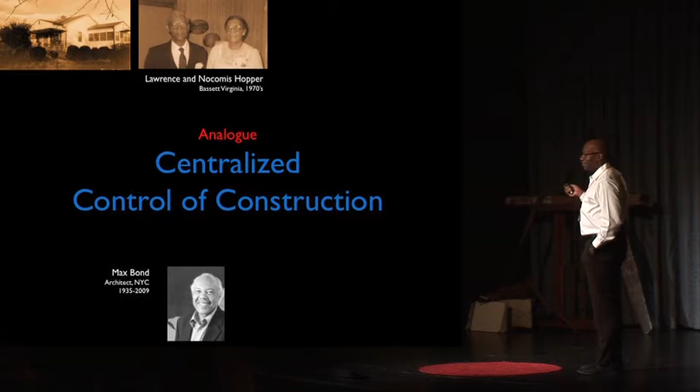My grandfather was a man in Virginia. He only had a sixth grade education, and he built this house for his six children and my grandmother with just a few very simple tools, very common tools, saws, drills, knives, blades for cutting tiles and things like that. But he did a great job with very little. In fact, I definitely couldn't do that. I can't even build my daughter a playhouse. So just the thought of being able to do something like this has always intrigued me.

But I grew up in New York City, and I watched this architect, Max Bond, since I was in high school, build low-income housing for people in my neighborhood, which was Harlem. And I noticed that he had a really great way of getting good, high-quality housing to large numbers of people at a somewhat reasonable price. But I don't think that's always possible today, and I'll sort of explain why.

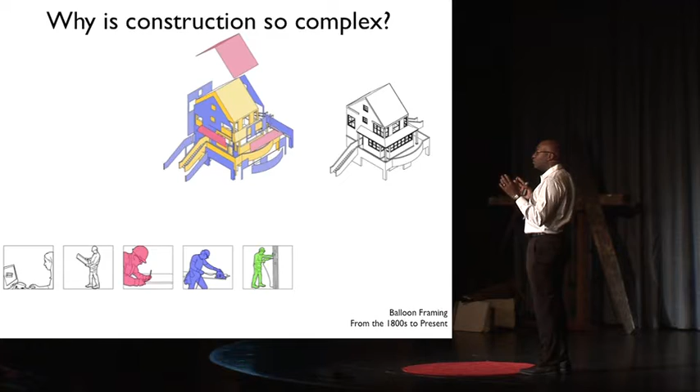I think most of us always ask the question, why is construction so complex? Why is it that when a tsunami hits, or an earthquake, or a hurricane, it takes so long to rebuild all of these rich, interesting houses that we've lost? A great example is New Orleans, which is still struggling. Well, it's very simple. The one thing that all carpenters do and designers do is compute. It's a common theme. Everybody computes, which means that everybody's counting and thinking about geometry and how objects fit together and how to count steps in producing an object.

So here, for example, you have a designer at the left-hand side, a contractor interprets the drawings, someone takes that interpretation and marks it or measures it out onto a piece of material, cuts and assembles that. One problem today is that the person at the end of the chain has very little relationship with the person at the front of the chain. The designer has no influence on how things are assembled in construction, and the people who are all the way at the end of the chain can never participate in the design.

So if you look at the colored image of the house, it's a James Cutler house from the 1990s. It's a wooden structure, wood framing, which is the yellow, which goes up very quickly. Wood framing always goes up very fast. And the complexity is getting all of the other colors onto it, the slabs or the tiles, roof tiles, waterproofing, getting all the additional materials, flooring, getting all of that stuff cut, measured, and assembled. So the complexity is in the red, the blue, and the green person. Each component in the house has to be touched, measured, and manufactured by someone. So if you have 10,000 pieces, you're repeating that step 10,000 times over.

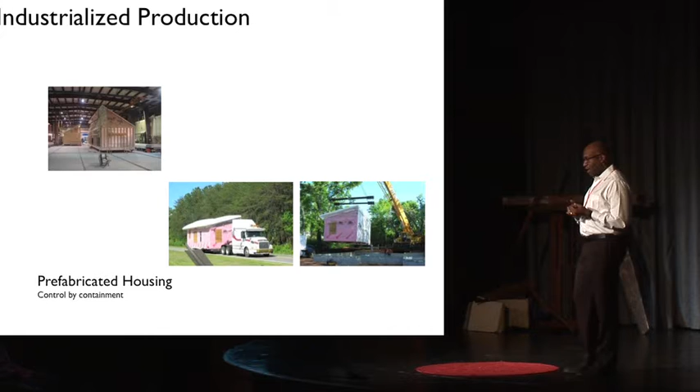Pre-manufactured housing is no different. You're paying for all of those steps, plus you're also paying for the heating of the factory, you're paying for the crane, you're paying for the truck. You're also paying for double the structure. You have to structure the box for movement, and then you also have to add more structure to the box just to make it a little bit stronger, but you're paying for a lot more. So the industrial process is a very labor-intensive, and in many ways, I think, out of control method of production.

So today in the information age, we have a way of producing things that we're probably not even thinking about or aware of that's happening around us, which is the idea of decentralized production. And if you think of decentralized, you could probably think of what's been going on in the Middle East. There's no single person that's in control of all of the things that have been changing, but you could tell that there's some level of control. So the question is, how can we do that today?

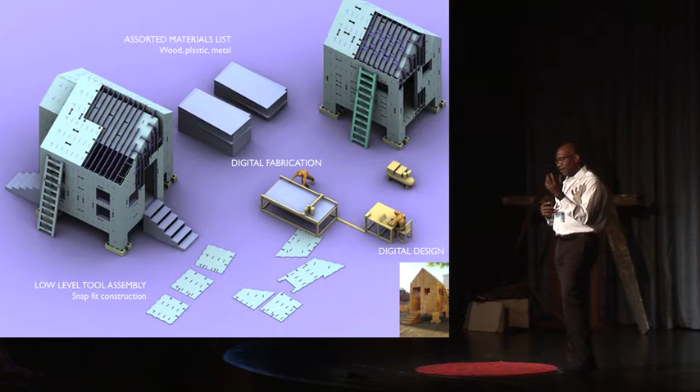And here's a sketch that explains a little bit of what I'm talking about. So you have to imagine the digital designer, the person sitting at the laptop, downloading a file or downloading a series of files, and then they send that to a machine that's run by the computer.

And the machine doesn't just cut out parts, raw parts. The machine also puts a number on each part, and the machine draws each part or cuts out each part so that it only fits in a certain location in a certain way.

I had come up with this idea back around 2003, but in 2005 I had a chance to build a small cabin which was made out of all interlocking parts. It was about 80 square feet, all interlocking plywood pieces, no glue, no nails, screws, anything. And again, it's because you can calculate how things go together, and you could also calculate the strength of each part.

So this image shows a little bit of the advantages. The first is that everyone can participate in the process. So I have two students here, Dan Smithwick and Dennis Michaud, and what they're doing is they're building the computer model. They built the two computer models up at the top. One is the skin, and one is this internal lattice. And they built them separately on two separate computers. And then they brought them together by prototyping the pieces.

So they ran the pieces through the laser cutter. The laser cutter cut out all the parts with all of the connection pieces, and they were all numbered. It was all encoded on each piece, and then they attached them together to check and see if all the pieces fit. And I'll show this project a little bit later. It's a museum exhibit in New York City, and there's Dennis up on a ladder assembling the parts that he just laser cut about a month earlier.

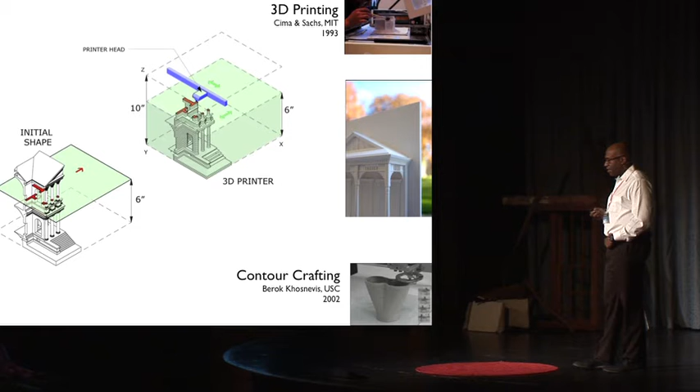But the process, I was inspired to do this by looking at three-dimensional printing. I was introduced to three-dimensional printing by my PhD advisor, Bill Mitchell, in the late 90s. And the one thing that happens with three-dimensional printing is it automates the three areas of computation that I just mentioned. It takes in a three-dimensional model from a designer, a kid, anybody can print with a 3D printer. It scans a section through the model, does a calculation where it creates the contours around a section through the model, and then it prints one layer at a time, just like a layer cake. And each layer is adhered to the previous layer.

So as an automated system, it's doing three things at one time. It's measuring, manufacturing a layer, and then it's assembling that layer to the previously manufactured layer. So it's doing those same three operations in one shot. And you can produce really beautiful models like the one in the middle. It's a model of a New Orleans shotgun house.

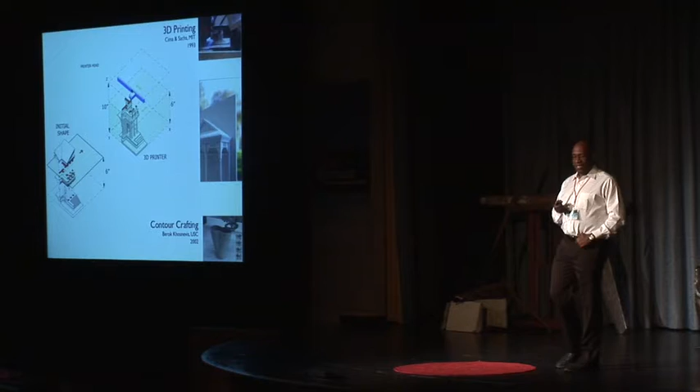But then at the bottom, a really good friend of mine, Berok Khosnevis, back in 2002, came up with the idea of house printing and printing with concrete, as opposed to printing with plaster or plastic. And his idea was that you would print in big, nice, thick 3-inch layers or 2-inch layers of concrete, one layer at a time. But you can imagine that gets a little difficult and redundant, and it's not scalable. If you need a house, you need a machine the size of a tall building. If you need a tall building, you need a machine the size of a gigantic building. So it makes it very difficult to scale that type of process.

So my idea was almost the same thing. Take a three-dimensional model, read in that data, run calculations over that model, and then develop the pieces into two-dimensional sections and cut them with a laser cutter, or a CNC machine, or a water jet cutter, or some cutting device that's controlled by a computer. So here what I'm showing is a ball that was first made in the computer, and then we ran it through a few computations, and it managed to develop all the little parts. But then we were also able to take each section and turn it into a variable, and then again calculate attachment features with each part. So each part has an attachment feature, an association with the next part.

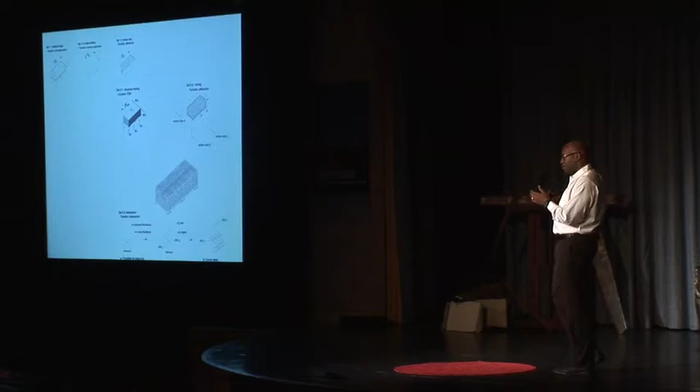So looking at this a little bit larger, I realize this drawing is a little hard to see, but I'll explain it. You're looking at a small cabin, about 15 feet by 30 feet. And what I've done is the same thing. We take in a three-dimensional model, we take variables from that, we calculate, we store those variables, and then we do calculations on them. So the little box in the middle shows finite element analysis, calculating that building using a computer program to test it for structural capacity. And then if it passes, we then go through the same sectioning process that I had mentioned with three-dimensional printing. We slice the model in sections, but this time we do it in 3 dimensions. Instead of just slicing in the Z direction, the way that we did with the layer cake, this time we slice in X, Y, and Z.

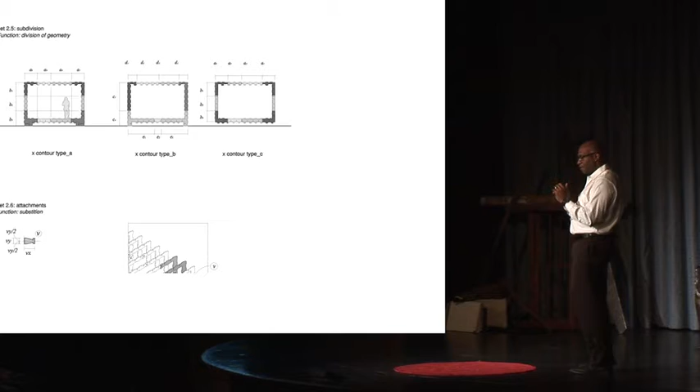And then we end up with contours. So if we look at a contour a little bit more closely, you could see from looking at the size of the person that that contour also needs to be subdivided into small parts. It needs to, again, go through another computation.

And carpenters do this. This is exactly what carpenters do. They take parts, they figure out what the maximum size of the part is, they divide that part up by a certain number, they calculate on a piece of paper what it should be, and then they recut the part that they just cut.

So then here are a couple of other calculations just looking at the surfaces, but this is another operation called development, where you take a three-dimensional shape and you convert it or copy it to 2 dimensions, pack all the parts together, sort them, and then fit them all onto a sheet and give each component a number.

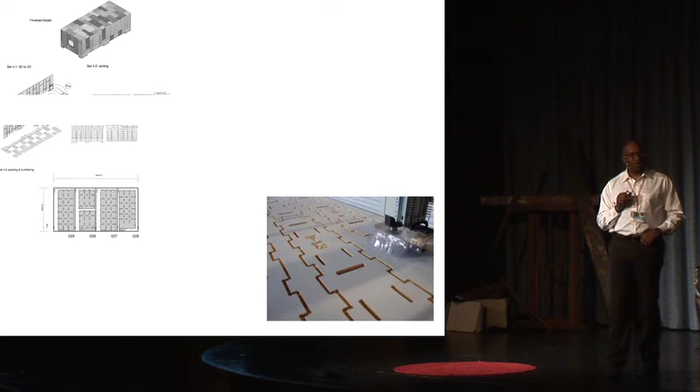So if we look at this slide of a part being cut, the part has a number of small, little, tiny micro fabrication pieces to it, cuts to it, and it also has a number.

So to give you an example of how this works, I showed you the cabin. Here's another project that I worked on back in 2008. It was a commission from the Museum of Modern Art. They had a show called Home Delivery, a 4-month-long exhibit. On the inside of the museum, they had models and drawings that showed houses from the past, like the Lustron house or the Package house, or some of the other really great inventions of their time.

And on the outside of the museum, they had full-scale buildings, 5 of them. One was a tower that was made out of aluminum, 2 other ones that were small buildings, really meant for 1 person, and the 3 in the back, mine on the left, the shotgun house, the one in the middle, the long bar, and the yellow one in the back, the burst house. They were all cut by digital fabrication equipment. They were all made pretty much the same way, but they're different buildings in different shapes.

So we cut all of our parts from that 3-dimensional model that I showed you that Dan and Dennis were using. We cut all of our parts in Exmore, Virginia. We then mailed all of those parts to New York City on the back of a truck. It was 10 packages of 45 sheets of plywood, but they all had the shapes cut out of them. When we opened each, or finished with each sheet, we'd cut out the next set of parts.

And this took some real careful calculating. You had to make sure that the sheets at the top of the package were for the bottom of the building, and the sheets at the end of the package were for the top of the building. So you couldn't just randomly pack parts onto sheets. You had to really think very carefully.

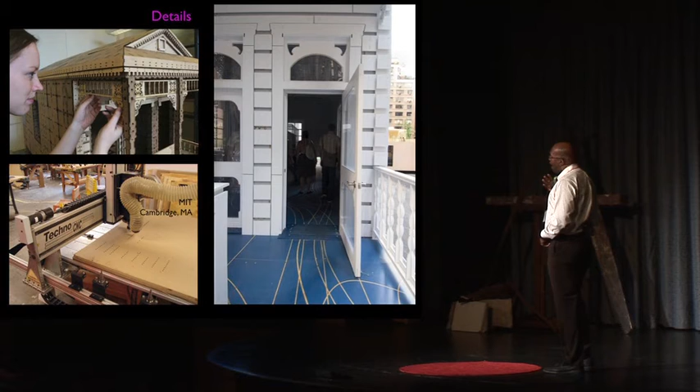So here's just looking at the details. The details came in after we finished prototyping the structure. What was really nice is here's Laura Rushfeld. She came in sort of after Dan and Dennis had finished. She just recut some of the structural skin, that last layer, herself, and when she added a new ornament, she would go back and take that piece out of the computer model and then recut that one piece so that the ornament would snap on.

And we cut all the ornament at MIT. We didn't cut this in Virginia. And what was really beautiful was that the ornamentation, once we started applying the ornamentation to the structure, it all fit perfectly.

So here was a person who had no connection to the first 2 people, and she was able to design and work with me very carefully on designing all of the little tiny parts, like the rails, the quoins on the side, which are square pieces, doors, windows. If you look, they're perfectly straight. Really nice, smooth, high-quality construction.

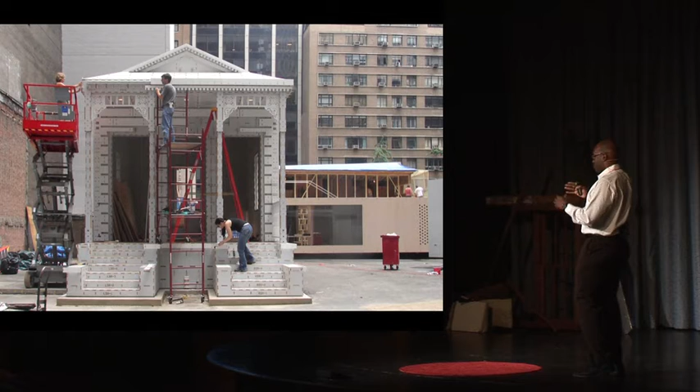And here's just a shot showing 2 other students assembling the parts. A novice can assemble really intricate woodworking and wood parts. And what was really fantastic, this is the best part about this image, there was the woman in the lower right. She works for the museum, and she had passed by us watching us put this building together over the course of 22 days. And she said, "You guys look like you're having a lot of fun." And so she took a day off of work, and we just gave her a hammer, and she just started hammering parts on. And she was hammering on the details, the stuff that's very complicated and hard to make.

So this is the finished building. We had a number of visitors. We had about 1 million visitors. We took the prototype model that we built at MIT and we put it in the middle of the room. And the prototypical model is exactly 1/6 the size of the real one. So if we know the prototype works, the real one works.

So what I've been thinking about since that exhibit has been the idea of integrating other systems into the building. What I just showed you was just the structure. It wasn't the plumbing, it didn't have bathrooms, it didn't have kitchens. So my question now is, can we integrate all of that stuff into the building? Can we make the building function a lot like a nice car, right? Get in your car, take your phone, most of us can make phone calls without tapping in our numbers. We can use the steering wheel. So the idea is integrating systems into wall structures.

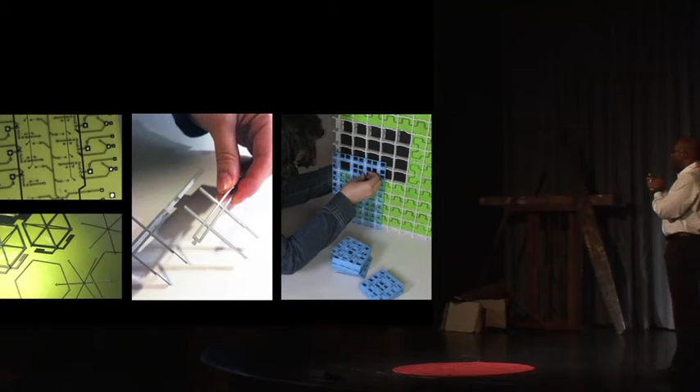So this is a printed circuit board, and of course printed circuitry was developed back in the 60s with the same concept as digital fabrication. You take a computer model and you send it to a machine and it prints out metal onto a fiberglass board. And then here, this is water jet cut aluminum. And the question is, can we cut out aluminum parts so that they fit together and work much like the stuff I just showed you, much like the trim that was integrated into the structure? Could we do the same thing with a wall system so we have plumbing, electrical, insulation, et cetera?

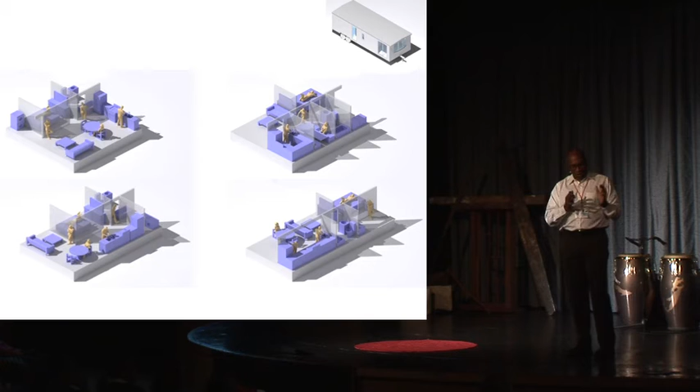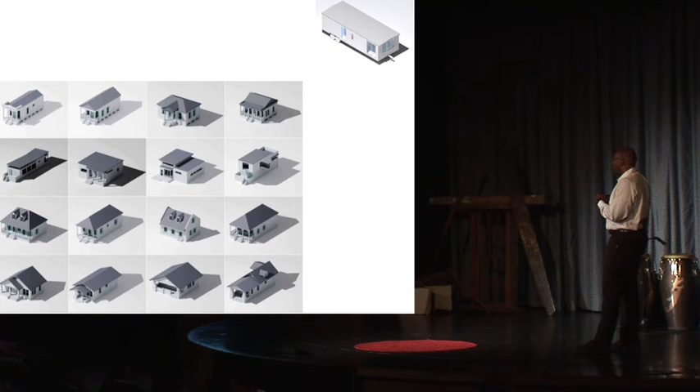So now we're practicing this on the idea of replacing trailers. Trailers are all over the States and also in other countries as well. And the idea would be to take the configuration of a trailer, let's say one like the lower right, where you have living room, dining room, kitchen cabinetry. And can you take that same configuration and change it around numerous times, make a round shape like a yurt, and then fit all of that into a trailer, but change the style. Create buildings that are the styles that people want, whether they're modern, arts and crafts, shotgun, doesn't matter. Every person has their own style that they like, and the key is marrying the function to the personal style. So can you use computers, given all the flexibility that they have, working with other people to accomplish this?

So just to conclude and summarize, to make the point very clear. Digital fabrication has to be the next step in home production, especially for small home production. There's no reason why we can't build small homes using machines that are attached to computers. It's the way IKEA works. It's the way that all kitchen cabinetry is manufactured. So digital fabrication is the first step.

The second step is getting other people to participate in the process. So I showed you how 3 students worked on this process. There were about 12 students in a course that I had taught that same semester that also participated on the design of all the components that I just showed you. We could do this on a global scale as well.

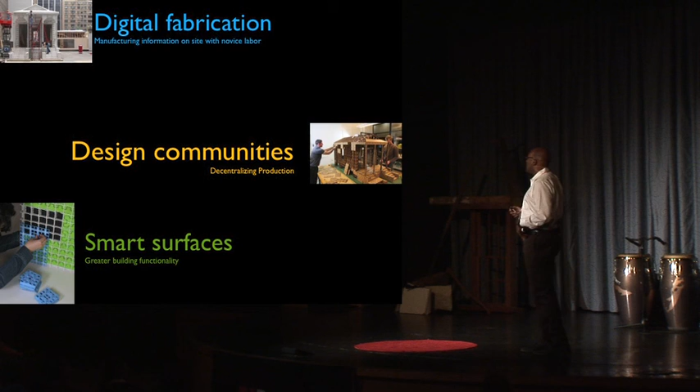And last is thinking very carefully about smart surfaces, how we can integrate a lot of functionality into surfaces so that buildings perform a lot more like a luxury car or a wonderful piece of electronics that we just bought.